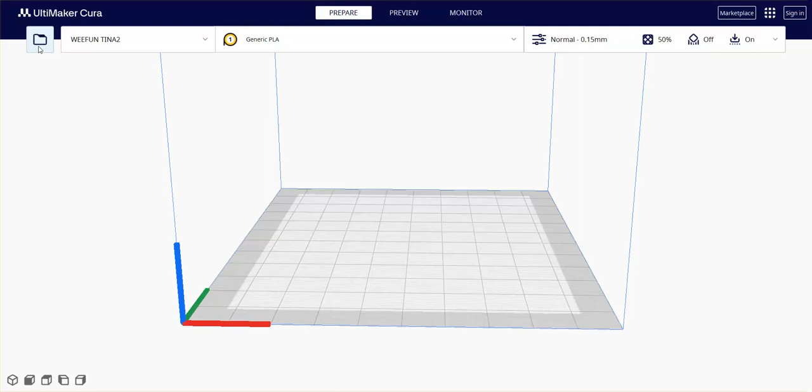Can I open up my project and get it onto the plate? So there's the model. If I zoom in a touch, we've got our air gap you can see, and that's that. I'm not going to print this with any build support. Build support stops things overhanging, but if I put support in, it's going to make it sticky, and it's going to be sticky enough as it is because of the way we've drawn it. So we need to make sure it releases.

Going to drop this down and go through the settings before we slice it. Actually, I'll slice it first so you can see what it looks like. This is a very fast video, by the way. There's lots of slicing, but you just spend some time reading up on it.

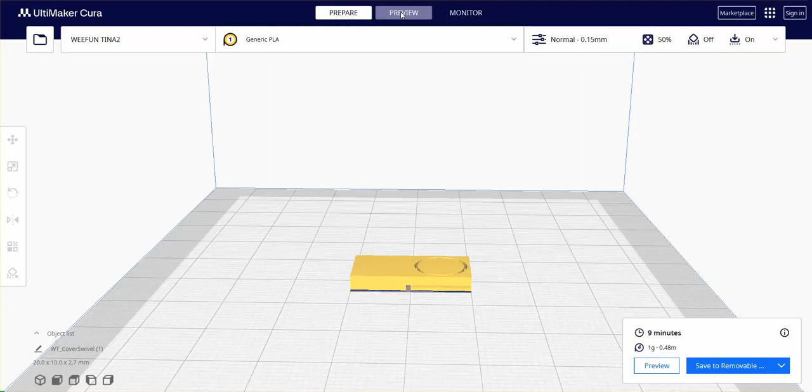If I go to preview mode, you can see the layers there, and I can even do a little playback. You can see there's the print head, printing the last little bit. Zin, zin, zin, zin - that's the noise it makes.

So moving on, we're going to go and look at the different profiles. Basically, if you want to get printing, when you load your printer in, you'll go into the printers and add a printer, add the one that you've got. It'll probably be in there, unless it's brand new, then you'll need to wait for the next update of Cura. They tend to be really good with that.

You've got your profile settings, so that's extra fine. I tend to either go for normal, or if I'm testing something out, draft - you probably won't use these bigger ones. It'll print faster but look a bit rougher. But if you're maybe testing something for size or shape, you can throw it on coarse. It'll use less filament, print faster, however it won't look very nice - it'll look a bit shabby.

In terms of our layer height, I'm not going to adjust that because this is all preset for me. I'm not going to bother with the top and bottom, leaving that alone. Infill though, I do need to consider.

If this is going to be structural, like my ukulele for example - you can watch some of the videos, I'm making a new one by the way, so watch the latest videos on the Weefun Tina 2 - I'd have that up at sort of 80-90% if I'm making the ukulele part that's going to take strain. This isn't going to take strain, so I'm just going to go for 50%. I could even go down to 10% if I want, but it's not going to make that much difference on a model this small. This is a very small model.

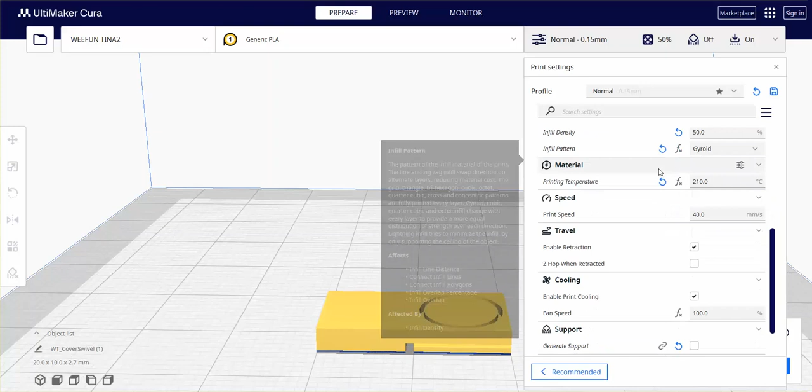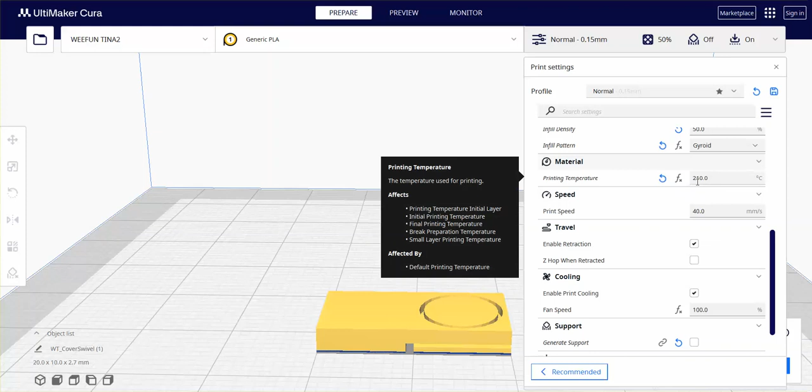Print temperature, I've got 210 in there. The printer I've got has a max temperature of 220. The limit on the filament I think is 230. So in the end, normally if it's over 200, your filament's going to melt. You do want to just have a little play with your settings. Sometimes if it's too hot, it doesn't dry as well, so you need to set that too. You just need to have a little play with it. 210 works for me with the filament that I use.

Print speed, that's your manufacturer's setting of the speed that things move for everything to work. So the extrusion rate - that's the fastest it can go with the speed it will extrude the filament without making a mess. If you put it faster than that, your machine will go faster but the extruder won't keep up. So you need to just look at what that is for your machine. You can set it slower, but it will be slower. I just set it to what the manufacturer recommends, and that is that for this one.

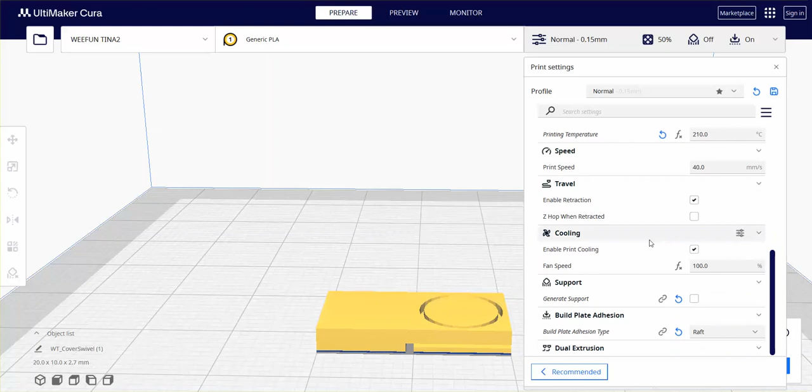I'm going to tick enable retraction. Again, if you hover over these things, you can read about them - I'm just going to ignore that for now. I'm going to allow print cooling, which lets the fan come on, and I'm going to keep the fan at 100%. I'm not having support.

So if I generate support, I'll tick it now. Look at this preview. If I do generate support and reslice it, I've got to reslice - I'm going to click slice. You can see it's put support in, but it's added support to places inside where I don't want support. So I'm taking that off and reslicing.

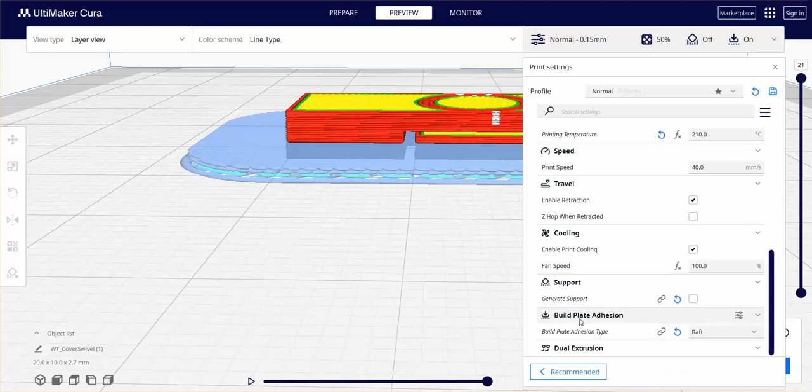So I've got a raft as my build plate adhesion. You can see this raft is printed on the bottom here. Because I haven't got a heated build plate, I'm putting a raft on. The general rule of thumb is if you want a good print, use a raft, but it can take quite a bit longer because the raft's quite big, especially if you're printing a big object. However, you get great adhesion and tend to have a better print at the end, less warping of your print. What I mean by warping is as the filament cools, it'll contract.

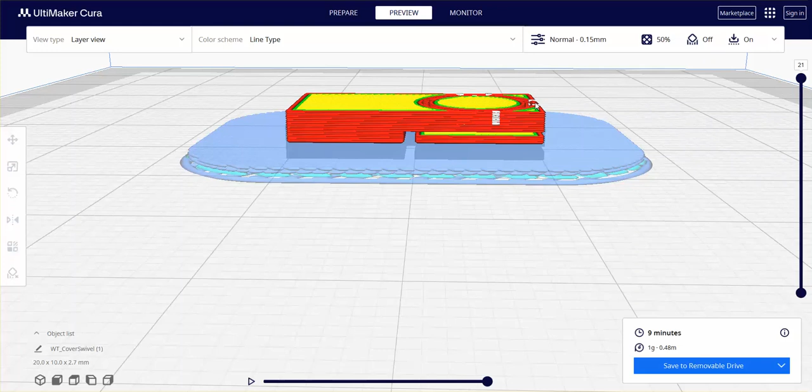So you might have little curves on the corners of your print because it retracts in as it cools down when it hits the build plate and cools fast, whereas this provides an air gap and also something quite sticky, so it stops or reduces the retraction and keeps your model more square, the edges straighter and flatter. Right, I tried to make that short - it wasn't very short, apologies.

The next thing is, let's get this onto the printer. You can see it says here save to removable drive. I've got a removable SD card plugged into my computer, and I'm going to send this to there, put the SD card in the printer and print it out. Watch the next video to see it all happening.